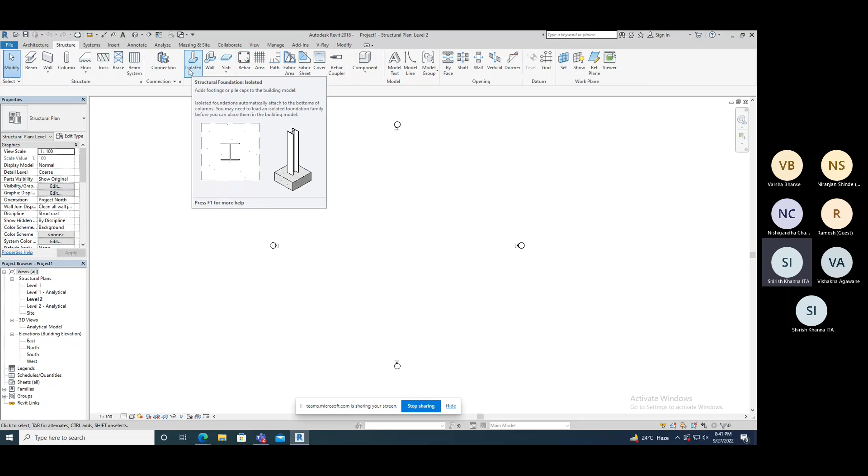Fine. Okay, if you want to place here your foundation, suppose I'm going to use a structure, I'm taking isolated. See the name, don't confuse with the name - it is not an isolated foundation only, it is a name, foundation. You can find out with your family.

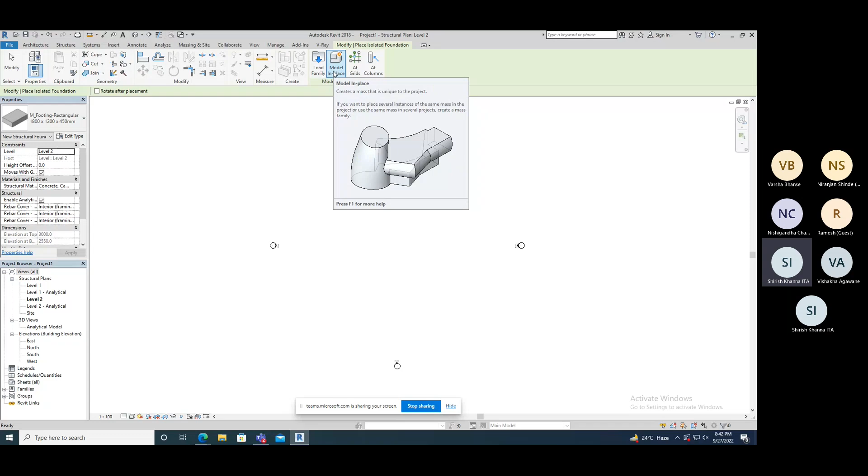Just click on this isolated, and see here in the top we have in the mode we have library. This portion here we have load family, or if you want to create a different type of foundation, we can create into model in place, or we can create into family. Whenever we want to place, we can create the type. But right now we are talking about the family of it.

How many types of foundation are there? So click on this load family tool, and we have to find out. By default here it is taken furniture, but we have to find out our foundation.

So go back. Now see, we are in US metric. In US metric, we are going to find the structural foundations. Click on open - these are the types we have available directly in the library: footing rectangular, pile cap with one pile, this is with two pile, three pile, four pile, five, six, seven, eight, till nine pile we have available here. And then we have pile cap with rectangular wise.

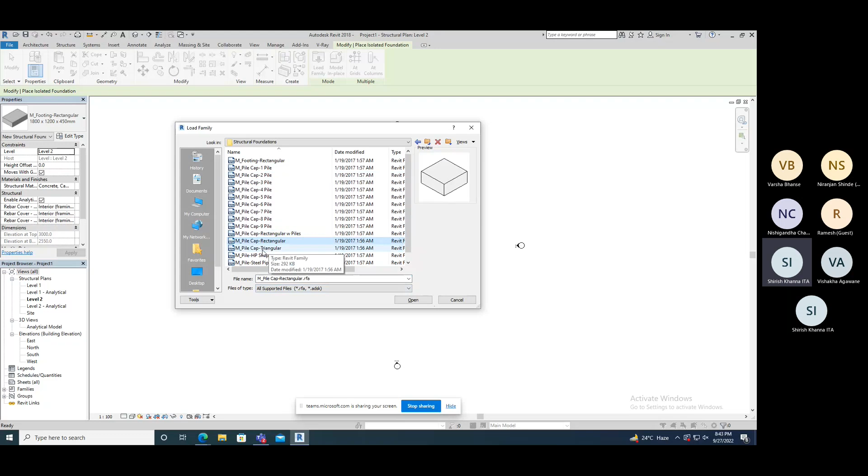We have pile cap rectangular, triangular, HP shape, steel pile. So we have different types of foundation here. But if you want to create some raft type foundation or tapered foundation, we can create our own - I'm telling you when we are working with the family file. Right now we can take from the library.

Okay, now I want to change its size. So what's going to happen is, suppose you click on this - you can see here I'm putting a rectangle 1800 by 1200 by 450. You can see in the properties where it is placed - it's placed at level 2, but we need to place it at level 1. So what we can do, since it's at a higher position, just select all and change its level to level 1, then click apply.

Now it is in level 1, but we are viewing at level 2, that's why it's not visible. So what we have to do is go to view range and change the setting in view range. Otherwise, go to level 1 and we can see it.

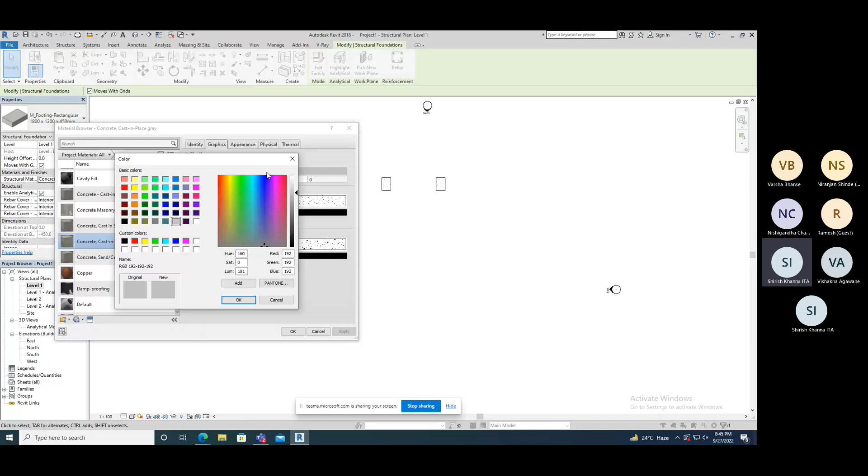You can change its appearance - this is known as appearances. Then change the color of it. Surface pattern - when we are seeing it from the top, it shows by dotted visibility. When we are seeing it in section, it will show like this cut pattern. The pattern should be in black color - see, RGB 000 means black color.

Now, what is the identity of it? Select it, and you can see its name is concrete cast in place. Description: cast in place concrete. Class is concrete - you can take any portion of it. If you have identity, you can change it from here. If you want to give some comment, some keyword, some detail of the manufacturer, model, cost, URL, you can put it here. Okay, this is the identity of the material.

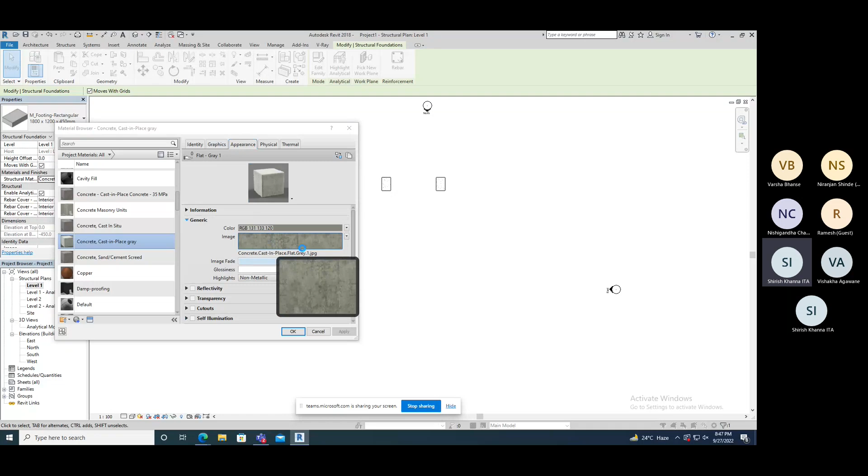Now next is graphics - you see the graphics of it. Now we are going to appearances, we are going to change the 3D image. We can change its image here, we can change its size here - so we can change it easily. Its size is 400 by 500, the tile size. When it's shown in 3D, it shows in this color, in this image. So we can change the image as well as the size of it. We can change the brightness of it. So we have multiple choices of options.

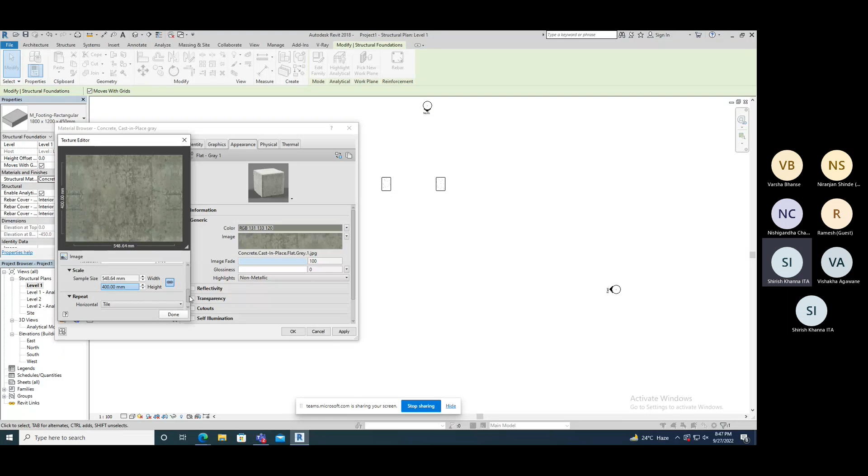The scale we need to change, if you want to change the size of your tile. This is about your appearance, how it's visible in 3D, in realistic view. Then if you have reflectivity, you can put it here. If you have transparency, you can put it here - cutout, self illumination, bump, tint. If you have some values, you can put them here. The colors are different.

Bump image we can change, tint color we can change. This is in appearances - it is for visibility purposes, how it looks in which view.

If I'm talking about the information, we can give here flat gray one - that is color description. Okay, it's a generic material.

Now, if you want to see concrete physical properties, like its name, keywords, type, class, and the basic thermal coefficient of it, you can expand here. Mechanical - you have the behavior of isotropic, Young's modulus, Poisson's ratio, shear modulus, density. If you have your densities here, suppose we go with concrete density basically 2500 kg per meter cube - it will take 2407.31 kg per meter cube. If you have your values, you can type them here.

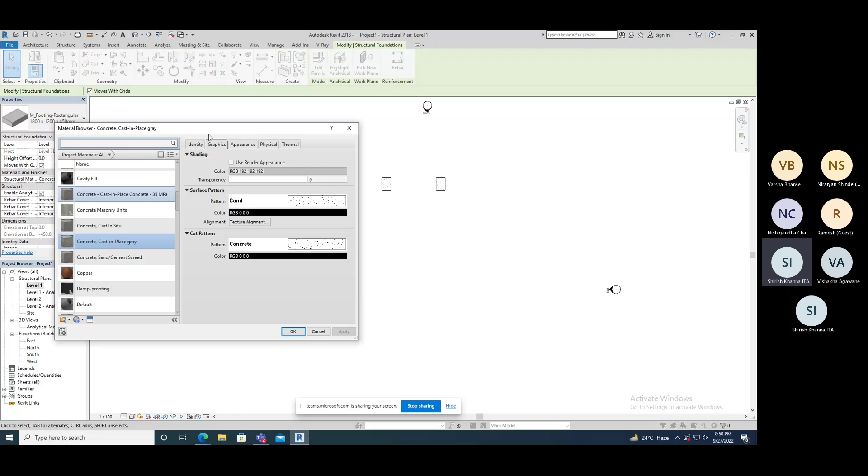This is the predefined material. Now suppose you want to create your own material, a duplicate with your own name.

So what we can do, suppose I'm using this concrete cast in place, but instead of gray color, I'm using green color, and I want to give it the name green. Right click over there and create a duplicate. All properties are same in this, but you can change its name, to green, suppose. All the properties of gray and green are same right now.

You can change its properties, and then you can use this one here. Just apply and click okay.

Clear? Shirish, is there a doubt on how to create a duplicate? Yes, tell me.

Shirish asks: this is only for visibility, right? It doesn't matter for exporting in AutoCAD. Whatever setting we are doing is only for this 3D or visibility, view only, right? Yes, yes, yes, yes, okay.

Continue - when you are giving detailed description, those properties are visible there. When we are creating the schedule, we want to see the material, which material, what are the properties. In quantities, it will separate it out if we select a certain material, right? I just wanted to confirm that it's not going to hamper the extracting of the drawing.

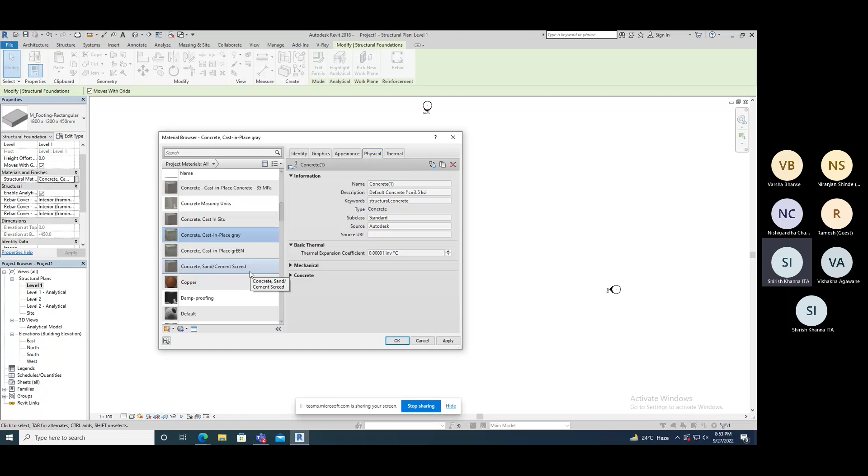Suppose you are going to create another foundation and you want to use the same property but different physical properties - we can't use it directly, that's why we need a duplicate. Anytime we need to use it elsewhere, we should use a duplicate, because if we change the property of that particular material or dimensions directly, it is permanently changed - meaning if you choose the same type for another thing, it keeps the same changes. So every time we are going to change something, we have to take a duplicate.

You always have to take a duplicate material if you want to use a different one. Now if you want to create a new material, we also have a complete library of materials here. Just click on this open/close asset browser, and you can check here - we have all types of materials, the appearances library, physical assets, whichever we want to use, we can use.

But if you... one second now. Hello. Sorry, my baby keeps going off my screen. Hello, I'm audible now. Yes, yes, yes, yes, okay.

Now see, here we have the complete appearances library, the physical material properties for Australia, Canada, Germany and all. Generally we are using physical properties in case of US, or you can use the appearance library. So you can see here we have lots - in concrete, we have lots, cast in place, in ceramic, we have options too.

Now in concrete, you can check here also - see the color. Here we have block, exposed aggregate, aggregate fine, medium, recess, E-form. We can use different types of materials. The appearance is going to change only - this is the color that's going to change. If you want to use the physical properties, go with the physical property US here.

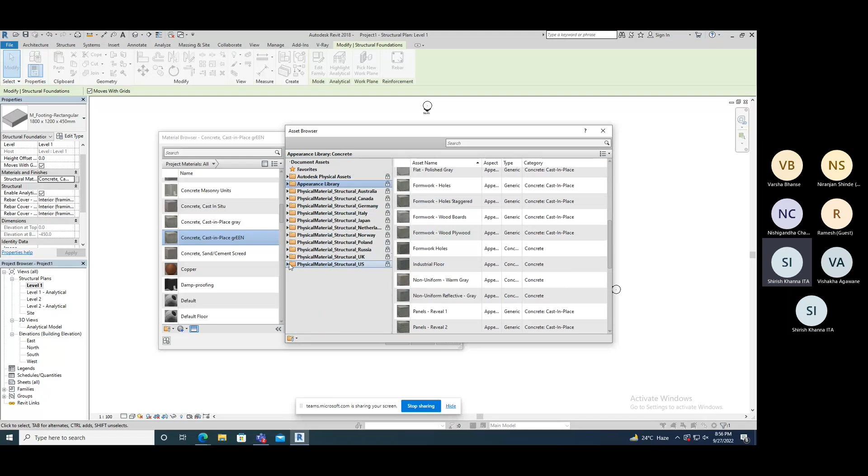And here concrete and steel is there. In concrete, we have lots of options, and similarly in steel, there are lots too. But how to use it? For that, you need to create one new material.

I'm creating a new material here - see the second option, create new material. Use it. And here it is named default material. Now rename it - it is Conc, suppose. I'm giving it the name Conc.

Okay, now I need to give here some different material. Go to asset browser, make sure you're selecting this Conc. And then you are going to use concrete standard. I want to use here the concrete 6 KSI.

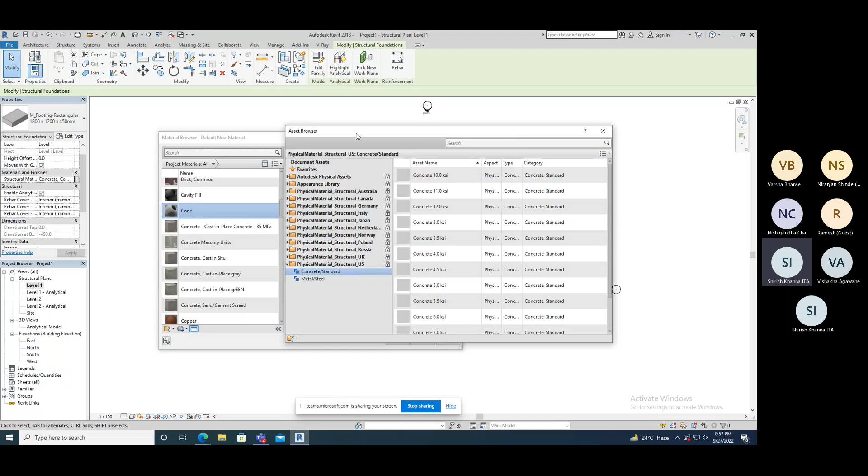Here we have option C, replace. So replace with what? This Conc. Replace it. The 3.5 KSI, all the properties are copied into Conc now. You can see the graphics of it, the appearance of it. It is not changed, right?

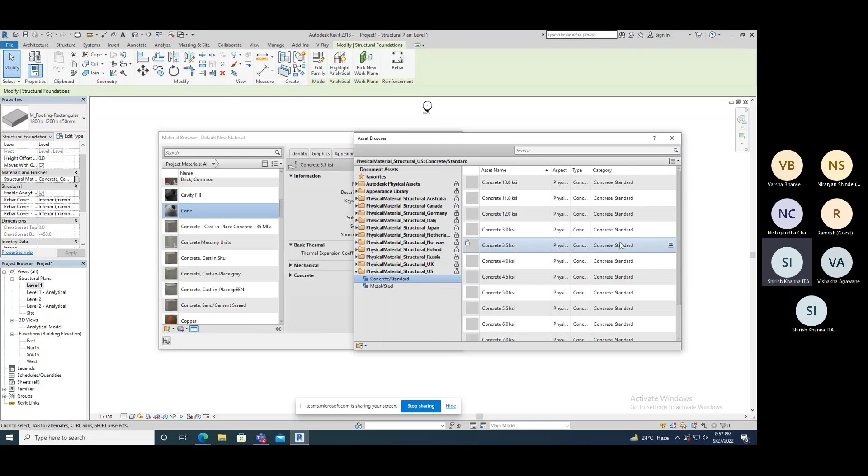Now see, it is changed. See the physical property here, 3.5 KSI. Clear? By default there is nothing, but now we are replacing it with concrete standard 3.5 KSI. This is the replace button. We can change the material over there, and then we can apply it.

Now in this we have Conc material, but in this we have concrete cast. So like this, we can use separate material for separate portions. Sometimes you are using different material, so you can. Is that clear?

Yes, okay. Now second thing is, suppose I need to change the dimension here. First we are going to check the structure portion. When we are working with proper structure, we need to know what is the cover portion. See, this is nothing. The value 1800, 1200, 450 is not visible here.

For that, here we have edit type properties. That is a very important thing. If you understand this type property, you are understanding everything in Revit. This is very important. Just click on edit type property. Now you can see here the width, length, and thickness, visible here, the values.

Now, just suppose you are changing here, I want to change into this only. But if you are changing the value directly here, that will change for all because all have the same value now. I am putting rectangular 1800, 1200, 450. That these three are the same foundation now.

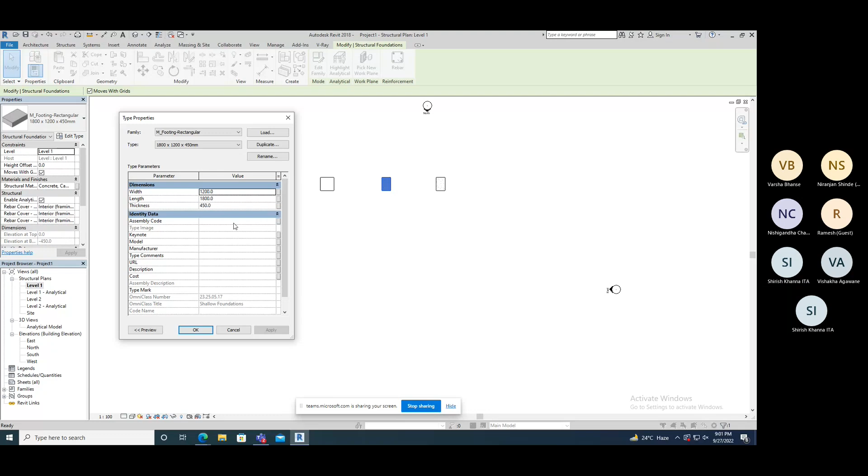Okay, now I need to play some more, like pile type. I'll show you that also. So to isolate it, load family, US metric, structural foundation. Now I'm using, suppose, a pile cap. Open it. See, it is visible here in the property. And now you can use it here like this.

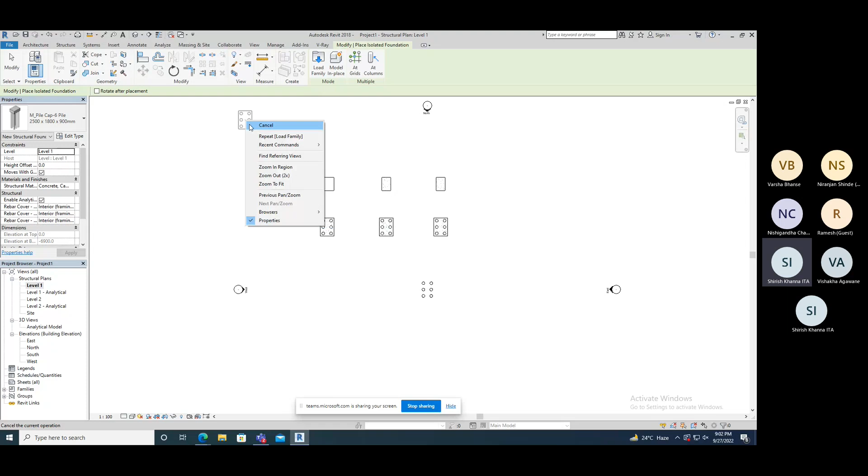Okay, now you can see it in 3D. It is like this. You want to change into realistic view, change the graphic display to realistic.

I have one doubt here. In our view, we don't get this realistic view visible at all. How does it get visible?

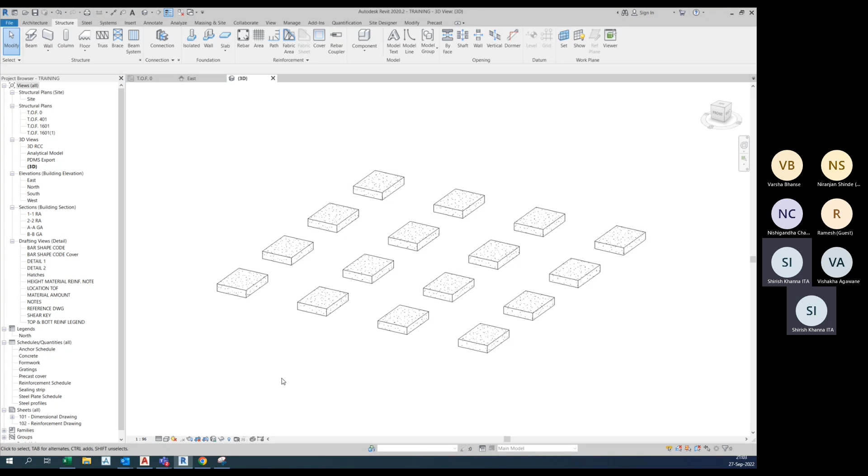And you have closed the property bar, na? Press PP on your keyboard. PP. Properties toolbar, I told you yesterday, na? You need to open the properties toolbar. Open it, you had closed that, na? Yes, yes, open it.

Now see in the graphic display here, edit. Click on the edit, graphic display, not visibility. Sorry, okay.

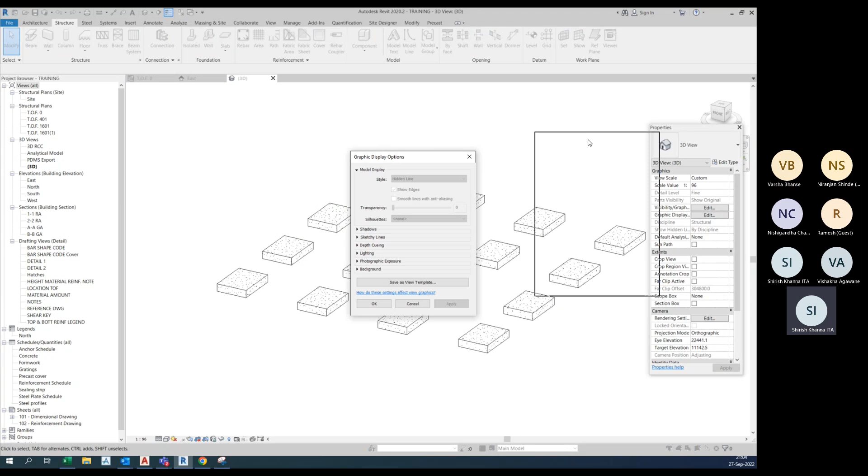Here it is also not visible, na? No, you logged something, nothing is visible. Close it. Visibility graphics is also not visible in your system.

Click on VG or click on edit. Here it is also not highlighted, na? Yeah. Okay, one second.

Actually, we are using our office template here. So in our property bar, we are using formwork template. No, in that all these windows will be visible in that template.

I'm getting you, Varsha. Go down after the camera. Where? Can you give me access? Yeah. Here we can visible all that things.

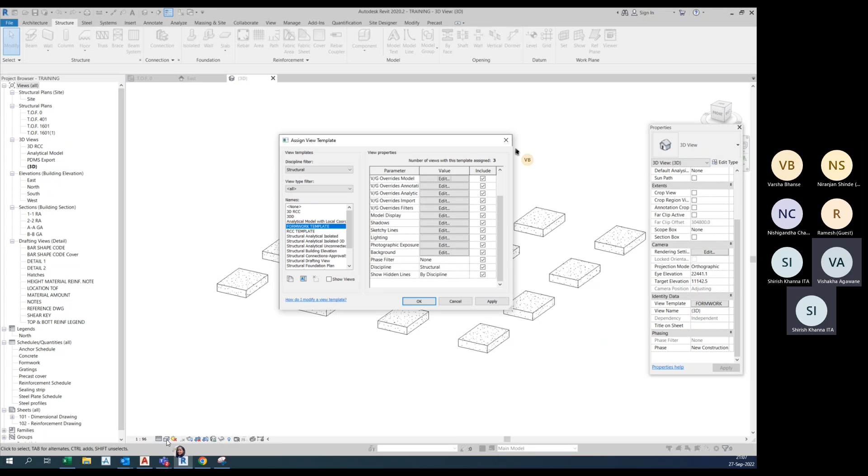And go to, actually, there is display graphics, finish pile foundation. Okay, sorry. No, actually, we need the pile foundation elevation 3D object, right? No, we have put foundation, but here we need to change it in realistic and other property, that is not visible here. This screen is off. Okay.

In my system, it is view template is none right now. Go with none, you can able to use. If you are using a structural model and analytical, you are not able to see. Yes. Okay, go with none, change the formwork to none, and then you can able to select all. None is selected.

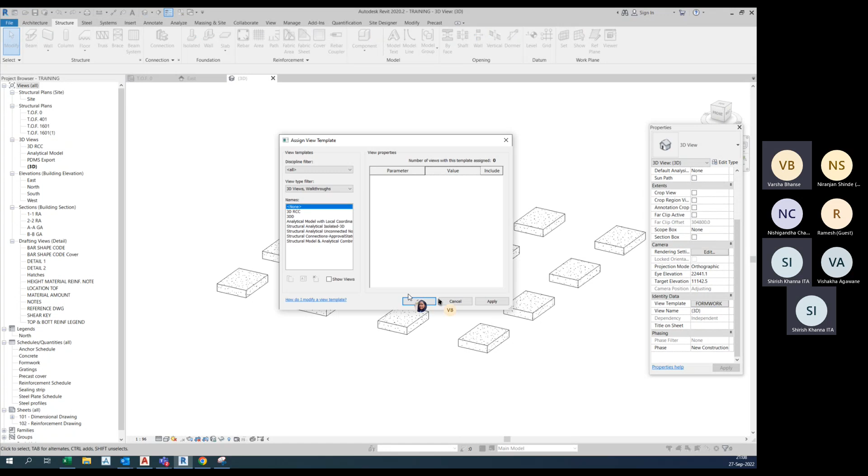So why shows formwork then? Here no, cancel it. Okay, here you have to say select none. None is there now. Now it is none. Okay. Now it is visible. Oh, yeah.

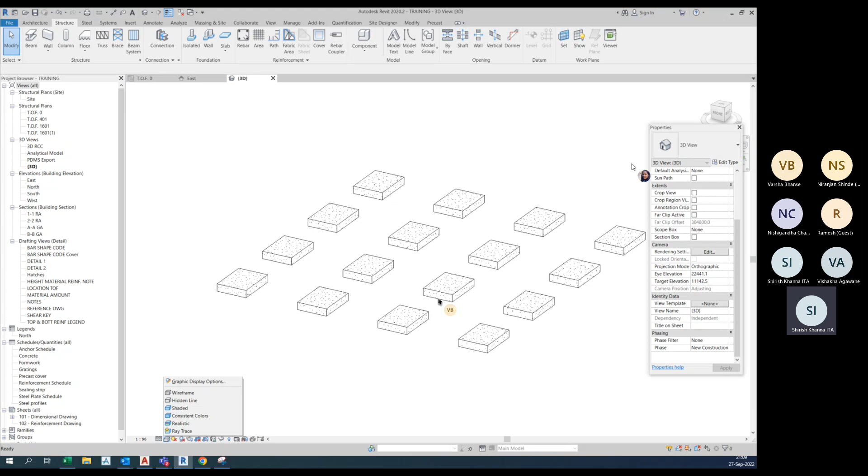In particular template, the graphics is changed. Okay. Yes. Okay, then. Now I shared again. Yeah, you can share, please. Now, next is

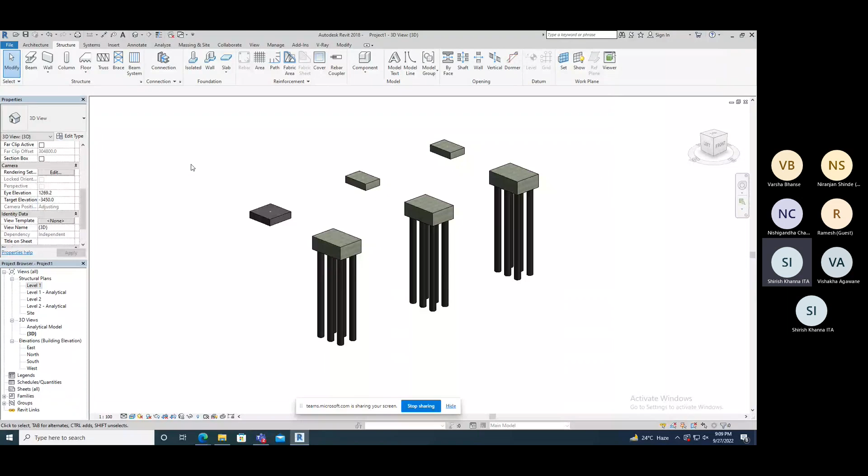this is about the properties, okay, and which type of foundation you want to use. Till now, any doubt? No, how to change the material, how to create a new material, how to replace with asset from asset browser, how to change the length, width, and height of it. All clear? Yes. See, all the things are visible into a particular property.

You are clicking on this. Here the elevation is minus 16,900. We can go to edit type and we can change it here. Okay, total length, cutoff length, clearance, width, foundation thickness is 900 here. We can change these all.

Here we have some more types, a structural foundation, 400 diameter. Okay, the diameter we can change also. Clear? Right now we have only one, that is 400 diameter. If you want to change or create a new one, so we can create into family. We can change it. Clear?

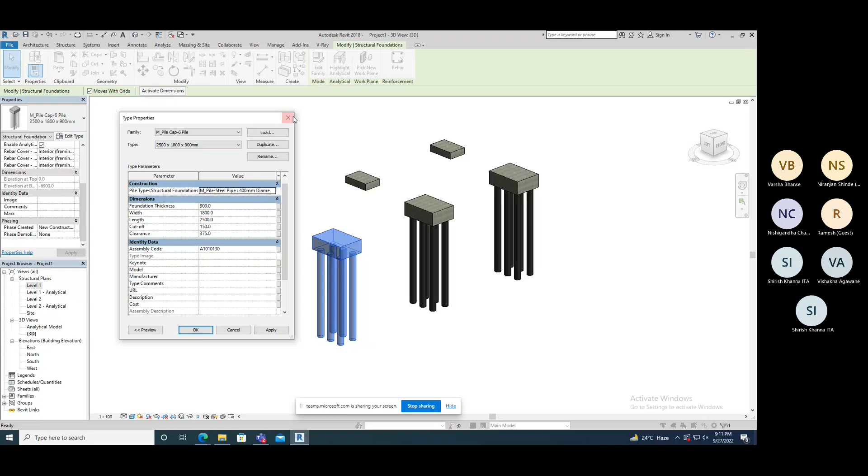Now, next is, are you aware about this tools, modify tools? Tell me first. You all know AutoCAD, na? Offset, move, copy, yes, rotate, yes yes, mirror, all commands you know. Now, how to use in Revit, I tell you this one.

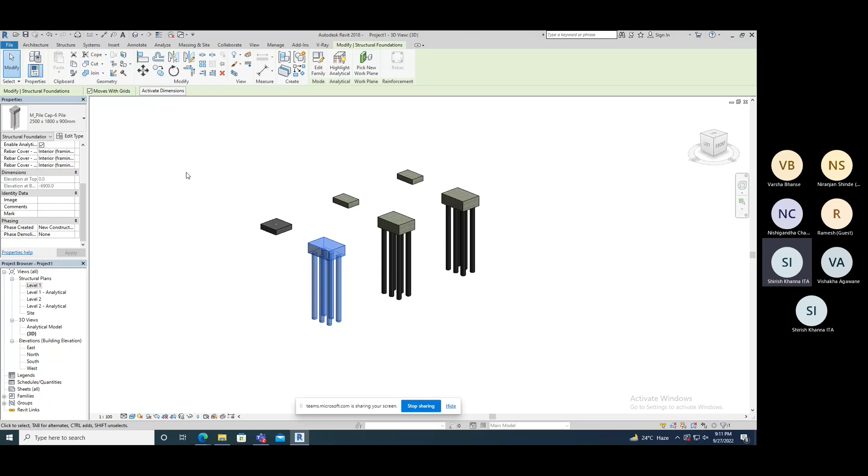Okay, this is all we want to use into this. See, every time we are not going to create a grid on all in the starting. We are just playing when we have to display to someone dimensions. Then we are using generally grids. Otherwise, directly we can create with proper dimensions. So that time we need that modify tools.

I'm going to level 1, and I suppose I have one foundation, this one, and I need to copy it. See, I don't have grid. So how much distance I want to copy or move? Suppose I want to move something, some portion. So we have modify tools. Go to modify tab in the top, and here we have modify tools.

First is align, second offset. Then we have two types of mirror here. Then we have split elements, split with gap, pin, unpin, scale, array, move, copy, rotate, and trim, three types, and then delete. Okay, I'm going to tell you these all first. Then we start creating drawings.

Okay, now suppose I have one more foundation placed here. Now I need to place it in an aligned way, means one is below it. So then what you do? Select and you can try to move it like this. Yes, this is one type. But you want to place properly in the linear, see both are same, then you can use place in the middle, aligned. Okay, but in case it's different shape, then I want to align by outer edges.

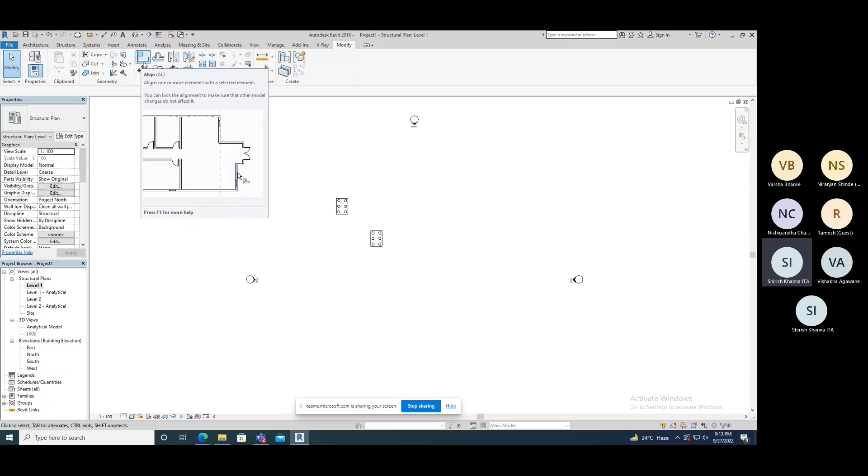So we have a command here into modify. First command name is align, shortcut is AL. No need to remember the shortcut because it shows when we are placing the cursor on the command, it shows 'align' in bracket AL. Just type AL, you are in the align command. Okay, I'm taking this one.

First it is asking for select first edge, then second edge, which is going to be aligned. Clear? So sometimes it is going to be moved after using align. I'm cancelling—it is aligned temporarily. If you are moving it, again it is going to be moved.

But you want to fix it with the previous one at the time of aligning. So again align with this. I want to fix it, so here we have a lock option. Just click on it, it is locked now. Now I want to move it—both are moved. So we can lock the alignment also.

Now I need to move here with a proper command. Generally we are going to move by dragging. By arrow keys you can move—this is by arrow key, we can move in the keyboard: right, left, top, bottom, wherever you want to move it. But if you want to go with the dimension, we can move through the dimension also.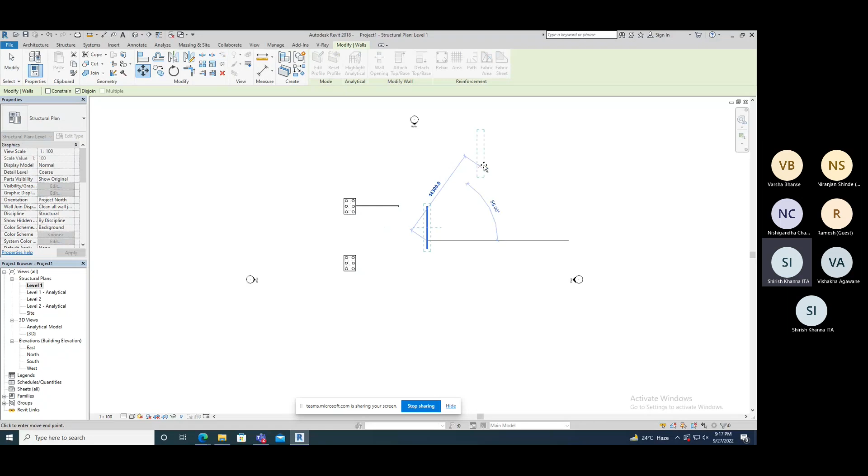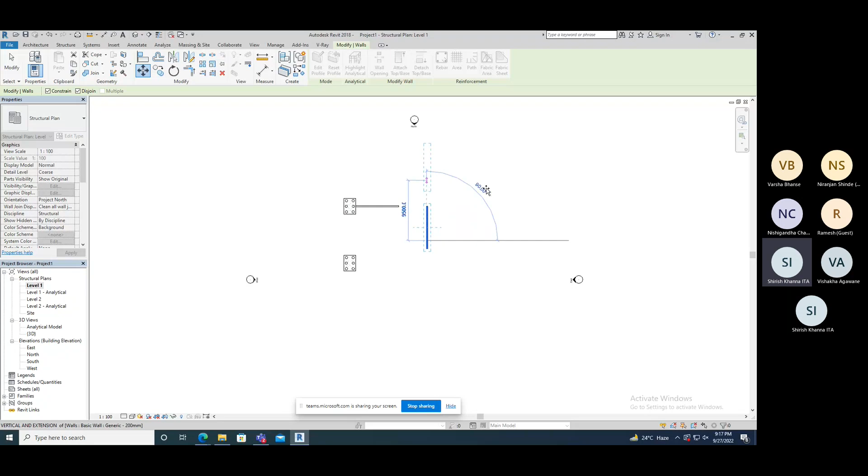Now one more thing is here: when we are going to move by command, we can move in any direction, at any angle. Now if you want to move only in X and Y, here we have the option constraint. So constraint is like ortho mode in AutoCAD. Just click on it and you are able to place only horizontal or vertical—now at any angle you are not able to place it.

Any doubt in move command? Align, move, clear?

Yes, okay. Now next we have offset. Suppose I need to create one wall at 1000 millimeter or 2000 millimeter, so we can go to offset. The shortcut is OF here. Click on it and type the value here, 2000.

Here we have two options, distance and copy. If you want to create one more, meaning copy, just click which side you want to create the offset. Click that side, so we can create multiple offsets. Okay.

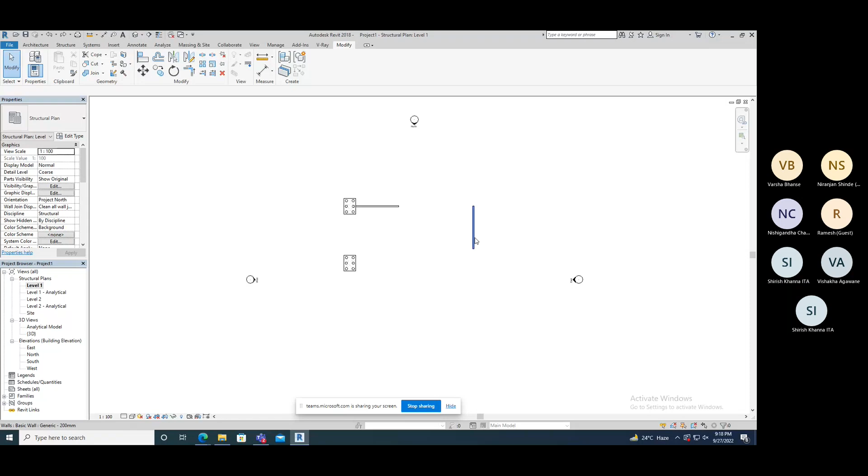Or if you want to change—see, every time we get only at 2000 distance by offset. Now just suppose I want first at 1000, second at 2000, third at 3000. So we need to take offset 3 times and change the value. So we can use copy for this.

So here we have the command copy, the shortcut is CO. Click on it, select your object, finish selection, then pick a base point like in move, and then copy it. See, first I want 1000, then I want 2000—sorry, it is a single copy now. If you want to copy multiple, here in copy we have an option.

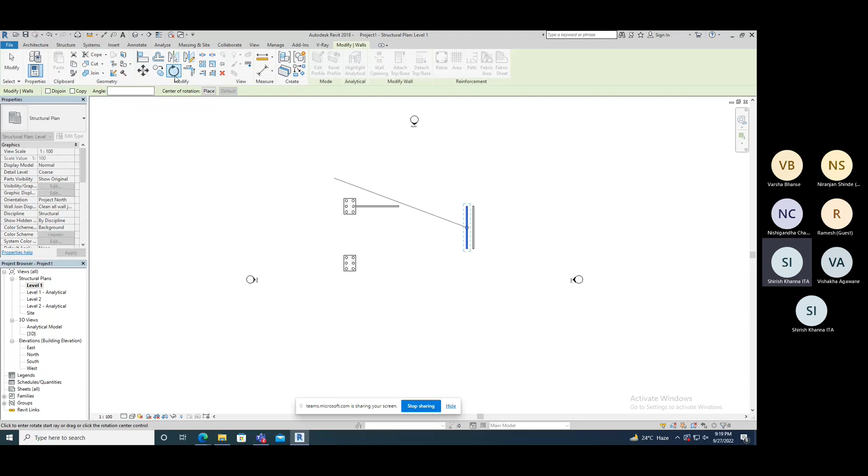Oh sorry, I'm taking the rotate command—copy. See, here we have multiple options. From the base point here: 2000, then 3000, then 4000. So like this we can copy. Clear? Any doubt in copy and offset?

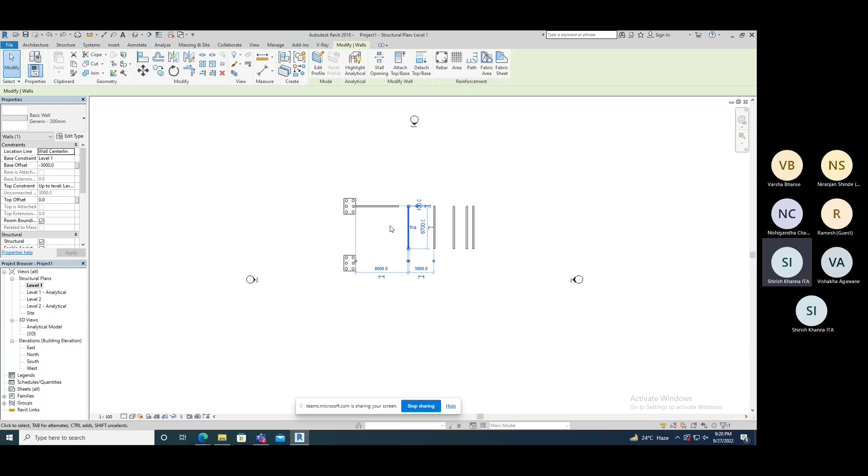Next is rotate. Suppose I'm joining these two. Now I want to rotate by this point, by 45 degrees, either this side or this side. We have command rotate. By default it's taken the middle point. See, it is rotated by this point, but I want to rotate by this point.

What we can do, see the options in the option bar. First is Disjoin - if we are rotating from here and rotate here like this, it will be extended or not, based on this join. Then if you want another copy at 45 degrees, you can click on copy.

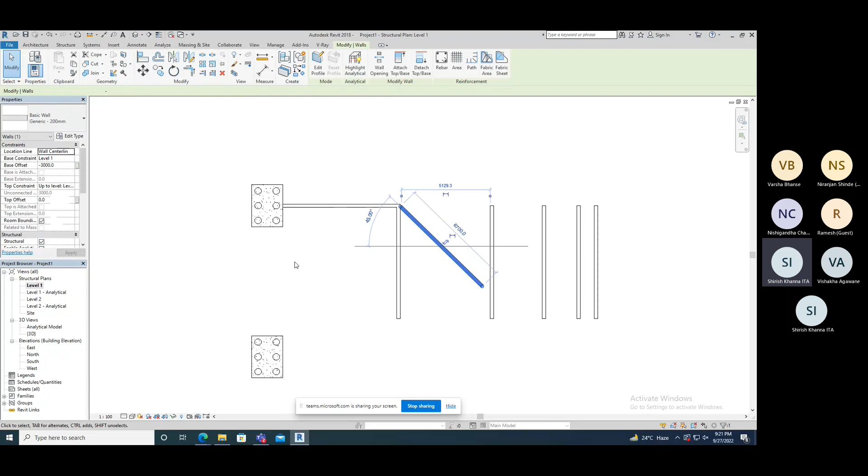How much rotation - 45. But I want to change the center first, so we have the option 'place center of rotation'. Click the place button and now you can change it by this point. See, now it is rotated by this. And how much you want to rotate by? 45 degrees. See, it creates one more because we are clicking the copy command.

Clear? Rotate command - you need to type the angle and enter. If you don't want to create a copy, rotate - place point is this, and I don't need copy, I need 45 degrees only. See?

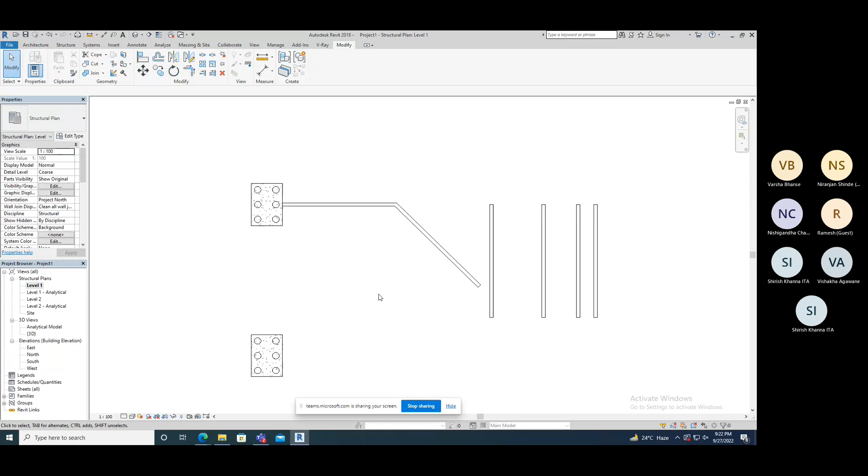Clear? That additional toolbar is not coming at mine. Sorry, the additional - can you click on the rotate command? Yeah. Okay, and then you are getting one additional tab over there, right? For giving the option bar - angle, yeah, so for that you need to select. After selecting, yes. It is not available till now because you need to tell Revit the selection is complete. So right click and finish your selection first. Okay, then you will get it. Otherwise, first select and then go to your command. Okay, then you need not tell it.

Okay, now rotate is clear. Ramesh, Niranjan, all clear? Yes. Okay. Ramesh, Niranjan - you said Niranjan is clear. Okay, Ramesh, are you there?

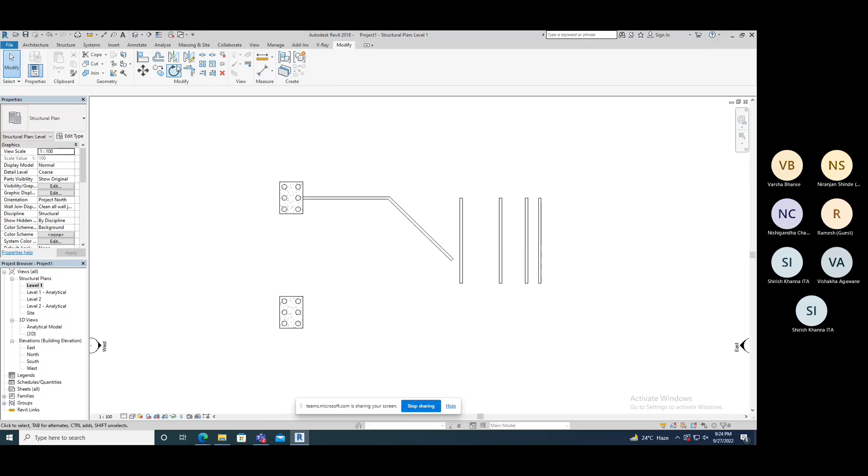Mirror - so here we have two options. First is mirror pick axis, shortcut is MM, and mirror draw axis, shortcut is DM. So what is the difference? Names also tell us the difference. Pick axis means you need an axis here so that you can create a mirror.

So I need one more wall. Suppose I'm taking one more wall here in the middle like this. If you have some kind of axis, you can use mirror pick axis. Then it is asking for select your object, finish selection, then select your axis, you get the mirror. Okay.

Otherwise, same thing - first select the object, so no need to finish selection. First select your object, then go to command. Then it is not asking for finish selection. Okay, just select your axis and you get the mirror. Or in case you didn't have an axis and you need that mirror,

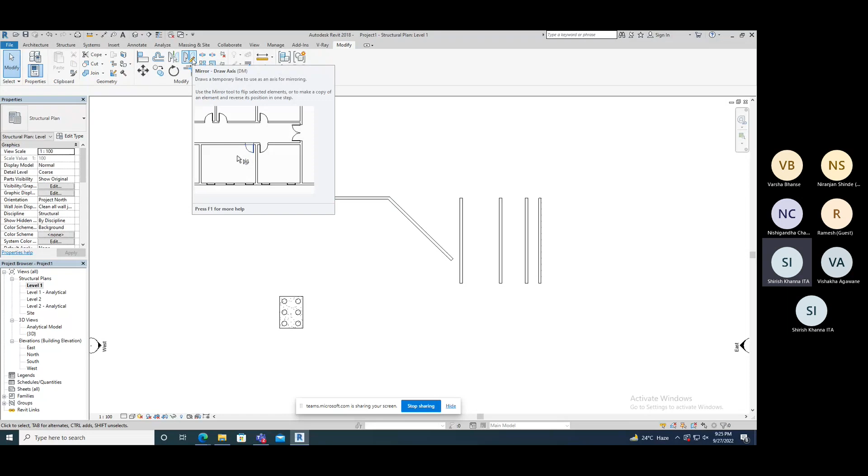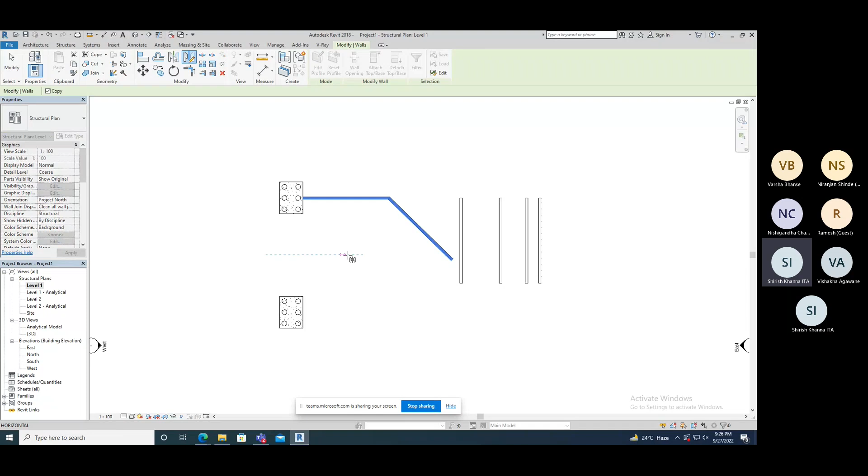then you can create it like in AutoCAD. In AutoCAD, we are going to create a virtual axis, na? Virtual line we can create in CAD. Same here, we can create a virtual axis here also. Go with this draw axis, mirror draw axis - select your object, finish selection, and create your axis here, first point and second point. You get the mirror. Clear?

In case you didn't have an axis, you can go with DM, the draw axis. Otherwise, you can use pick axis.

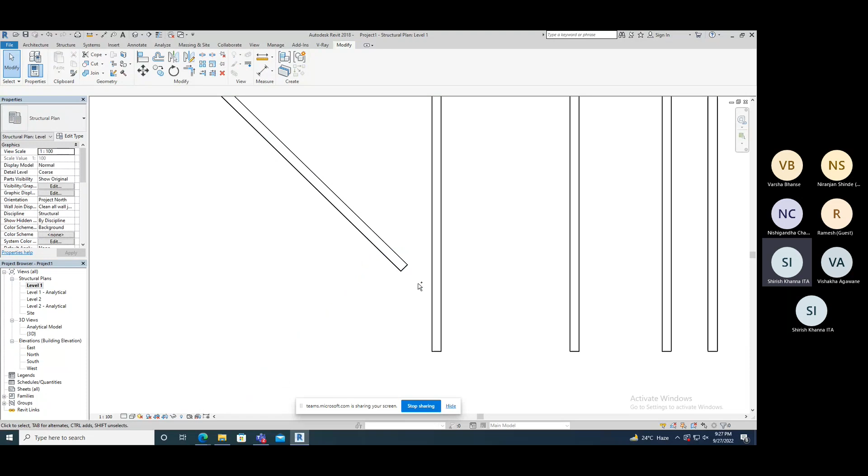Now next we have split. Split means divided into two parts. Suppose I need to split - by default, if I need to delete this portion, see, the total is deleted. So what we can do, we can split it, we can trim it - we have multiple options. Now I'm telling you split first. Split means you are dividing one wall or anything into two parts. The shortcut is SL.

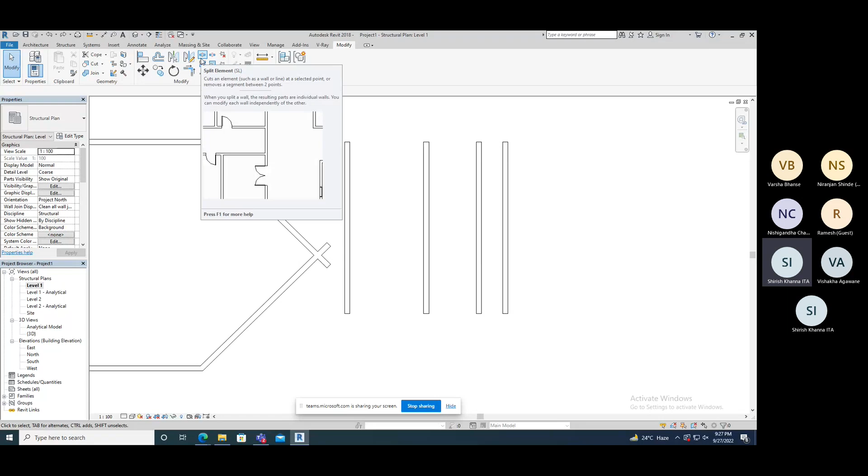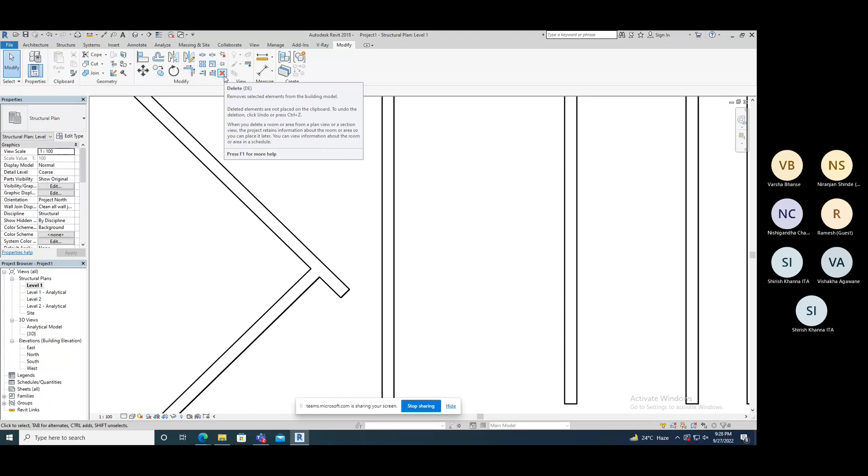Okay, this is split. Now going to the split command, you can place where you want to split here. Cancel now - see, it is different, separate portion, we can delete it. Clear? Delete - you can use the delete button as well as this cross.

Now here we have next split with gap. If you want to give some gap between the two, you can use this one. The gap is suppose 1 inch, 25.4. You want now 50mm, 2 inches - you can type, change the value, and just click, you get the gap. See, this is split with gap.

Next, we have pin and unpin. Suppose we have this object and we can move it anytime, or by default it can be moved or change its shape. So we have to fix them so that by default this is not going to be changed. So we can pin it. The pin command shortcut is PN, click on it.

Finish selection. Now it is pinned. Pin means now it is not going to move by default. See, I'm trying to drag it, but it is not moving. By arrow key also it is not moving.

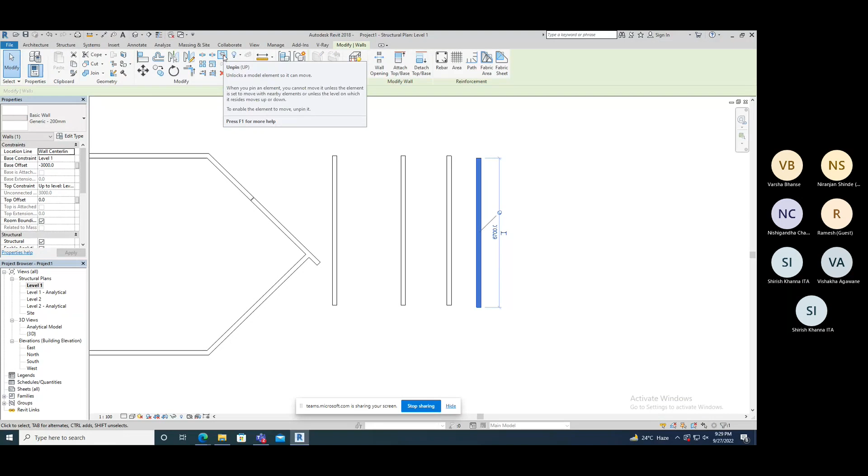It shows you can't move a pinned element. Even you can't delete it. See, pinned objects were not deleted. To delete them, you need to unpin it. How to unpin? Just click on this pin, or we have the unpin command. Unpin it, now you can move it, you can delete it. Clear? For a safety purpose, we can use pin.

Shirish: by mistake, it is not changed, yeah. Why pin it then, is there any reason for pin? Telling you, this is for safety purpose, so that drawing has not changed by mistake, mistakenly shifted. So is it better when sometimes you fix the location, you can pin it so that it will not move? Yes, yes.

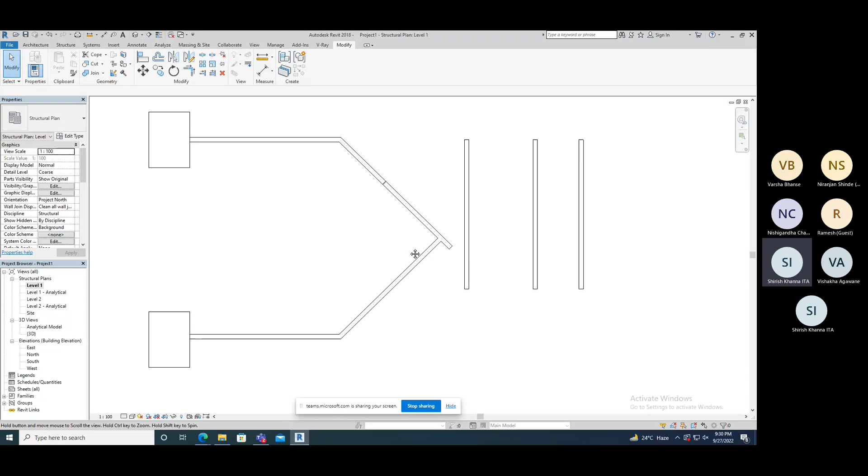So by mistake, it is not going to be changed, that's why we pin them. If you want to change, you can unpin it easily and then move it. Or like everywhere we are using right now the child lock, no? That is like that. Yeah, yeah. Okay, nobody can change it easily. If you want to change, you have to unpin first. Pin, unpin, delete is okay.

Next we have rotate, and after rotate we have trim command. Shirish asks: if I am working in some document, I finish it and I have pinned it, and if Vishakha is going to work further on that document, can she unpin it, or do I have to open and unpin it?

No, she can unpin it, it doesn't matter with user. User doesn't matter. For that, if you want to work like a project and you are using separate portions, that is a different thing, that basically comes under work sharing. In that case, if you are working on a document and somebody wants to change it, she wants permission first from you. Then you give the permission, only then she can change it. Otherwise it's not going to change anything. That is not pin and unpin, that is work sharing. Yeah, okay, I got it.

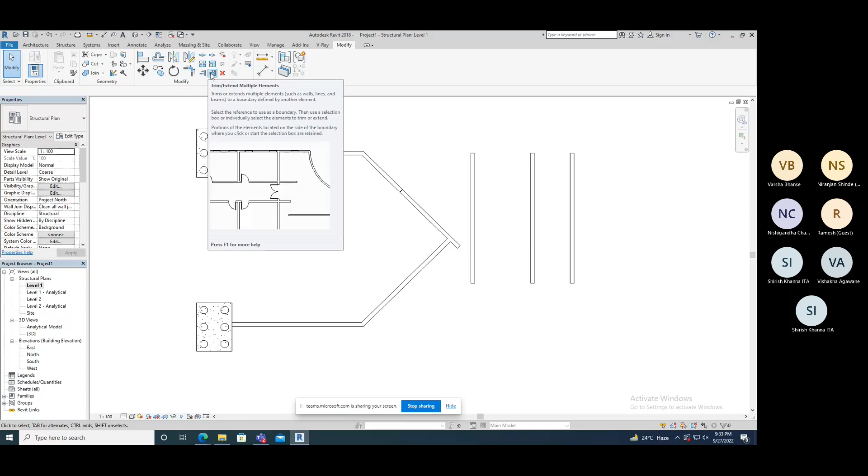Clear? Now we have the trim command. We have three types of trim, you can see by name: trim extend to corner, trim extend single element, trim extend multiple elements. The name will be clear now.

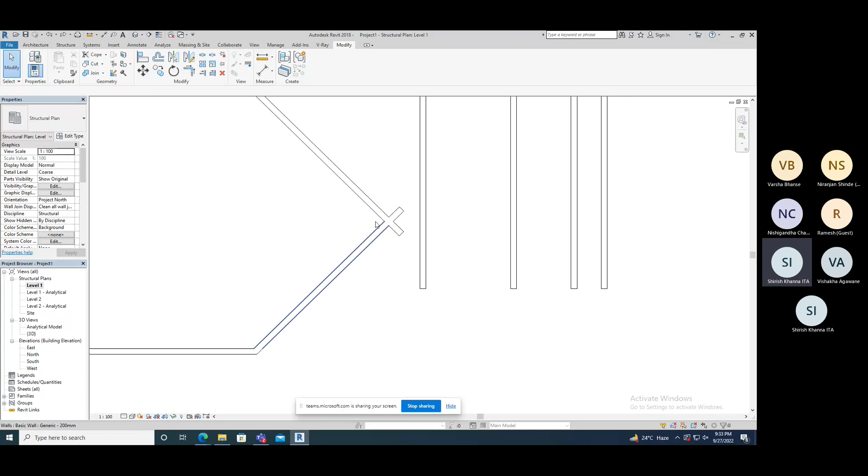Making corner: suppose you want to create a corner here. Before it, here we have two extra portions. I want to create only the corner, the extra portions I want to delete, I want to create a corner here only. So we have the first option: trim extend to corner. Click on it and select the side which you want, the other side will be removed.

Clear? Yes, it's same like AutoCAD, using fillet like trim. In AutoCAD, trimming portion is different, you have to select the portion you want to delete. Here it's opposite. I'm telling about fillet command. In fillet, in AutoCAD, you can't delete something, in fillet you are giving the curved shape, or you can join only, you can't remove that portion in fillet. Okay, got this. Now, if you want to use trim option into the fillet, then you can use this.

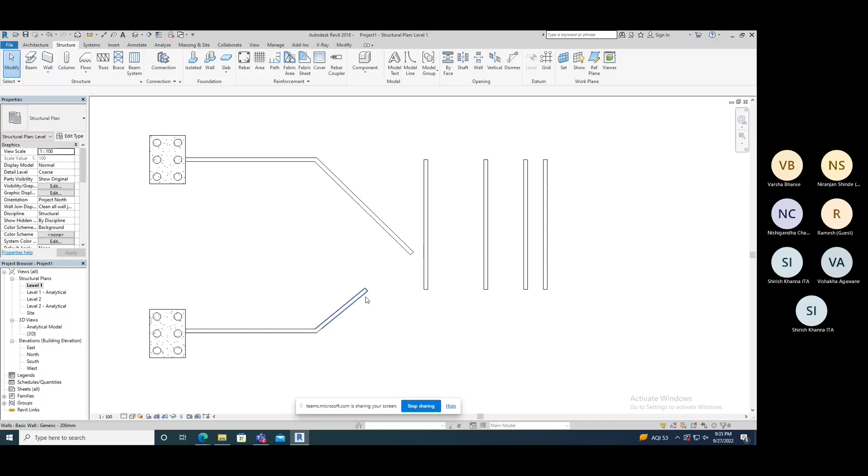See here, next, if this wall is not connected like this, I have a wall, it's not connected, I want to connect them. Means I want to extend this till here and make a corner. Same command you can use in trim and extend, for trimming also, for extension also. Select both the walls.

Clear? This we can also use as fillet in AutoCAD.

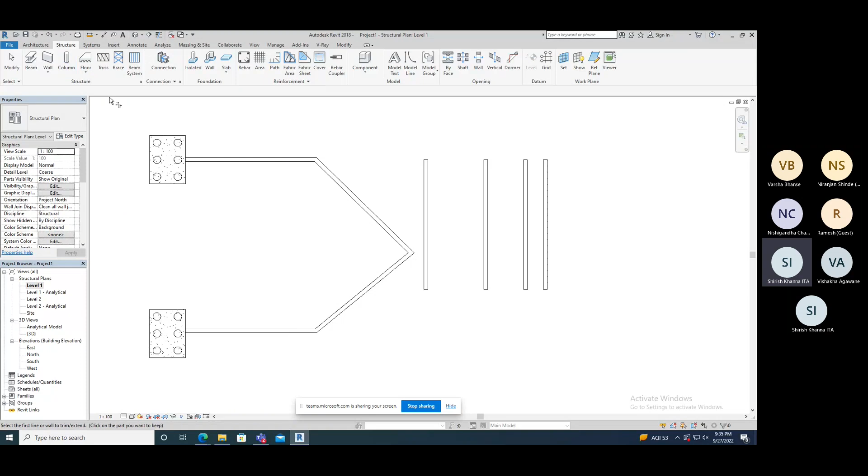Now, next we have suppose more walls here. I'm taking one wall like this. Now I want to trim only one portion, this one. I'm using the trim corner, so both are deleted.

Yes, I want to delete only a single element. So we can use trim single element. Okay, the trim single element you can use.

In this case, you have to remember one thing: first, you need to select a reference. See the cursor, select a reference as a trim extend boundary. The boundary is this one or this one. You can take any one, and then select which side you want to keep. The other side will be removed. Every time you have to select the other side in trimming.

Now, same thing if you want to remove all these three with reference of this wall, here we have multiple trim. Trim extend multiple elements.

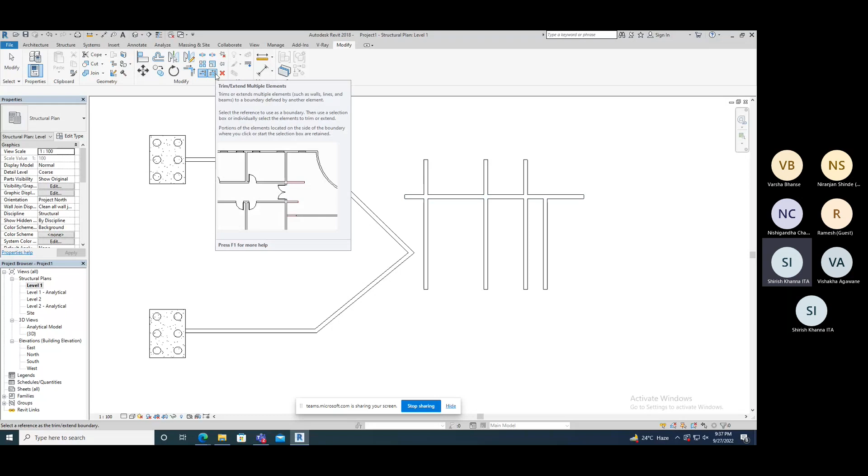Similarly here, it's asking to first select the reference. Then you can select by dragging. Oh sorry, I want to remove the upper side, so select the other side here. Sorry, first reference, then these are clear. Single element, multiple element, and corner.

Tell me, is it clear? Yes. Okay, because all these commands we are using when we are creating the structure. That's why I'm telling you the modify tools first.

Now next we have array and scaling. Suppose I want this foundation, say 5, required in a linear way here along the x-axis, and the distance is suppose 5 meters. So we can copy it, we can offset it, or we can use array here. Shortcut is AR, like in AutoCAD.

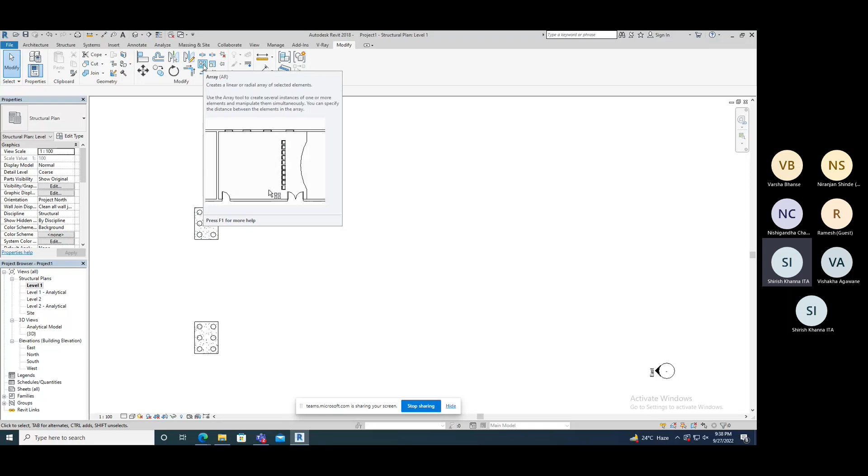So here we have two types: first, select object and take a finish selection. Otherwise, select object first, then go to your command so that you can get this option bar directly.

Next, here we have two options: linear and radial. Linear means your rectangular array, and why is it linear? Because it is moving in only a single direction. In a rectangular array, there are two directions, X and Y. Here we have a single direction, that's why its name is linear. Radial means polar array, it is about one circle.

Now, if you want to select all at a time, you can create it as a group. If you want to select a single entity, you can uncheck it. If you uncheck it, it is not editable after creating. If it is in a group, we can add a number.

Now, how many numbers do we require? Suppose 5. Here we have two options, second and last. Second means you have the distance between two. See, I'm using the base point and giving the distance between two, let's take 5 meters. Now all 5 are created.

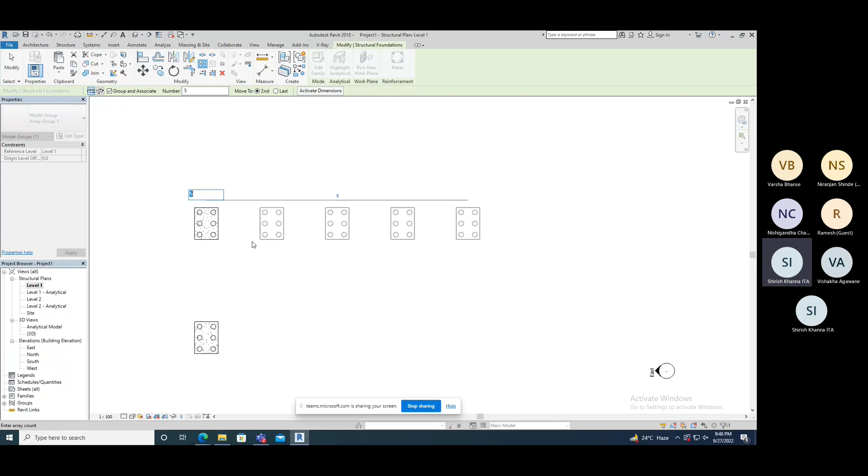It is a group, that's why this number is visible. If you want 6 here, change it and you can edit it to 6. If you are unchecking that group and associate option, it is not editable then, you can't get this value.

But once we use this array command and want to use a middle one, is it editable? Sorry, once we use the array command and create one like 6 as you did, and I wanted to update the third number, third part, update only a single one? You want to update individual size?

No, you can't change the value by arrow key if it's in a group. If you want individual objects, you need to uncheck the group. Only then you can use it individually, otherwise it's just part of the array.

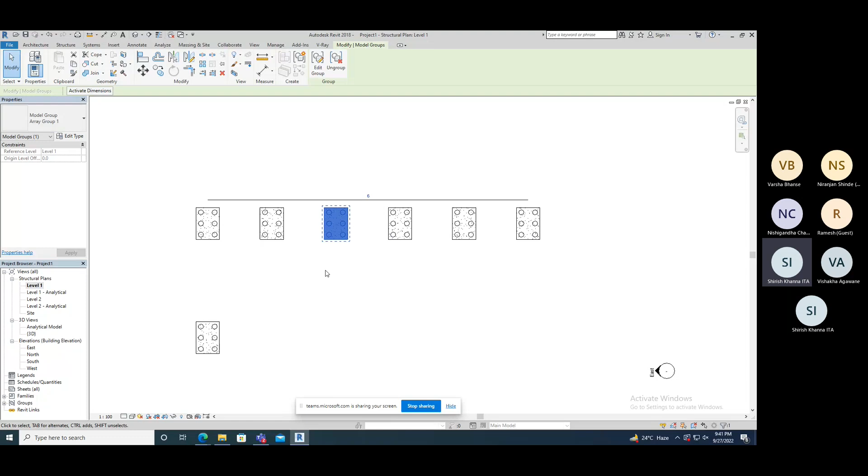Okay, if you want it separate, what we can do is I'm using undo here. I'm going to take the object, linear array, group and associate, uncheck it. Give it a value of 5 and use any value here. Now you can change any one here and there, separate, because it is not a part of the array now.

You can't change the numbers. Okay, and one more option was there in array. If you click on array, Last - that is the option Last.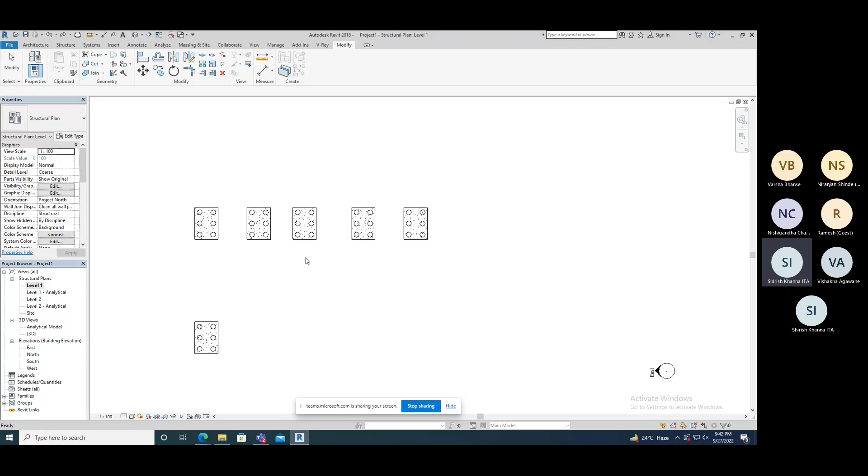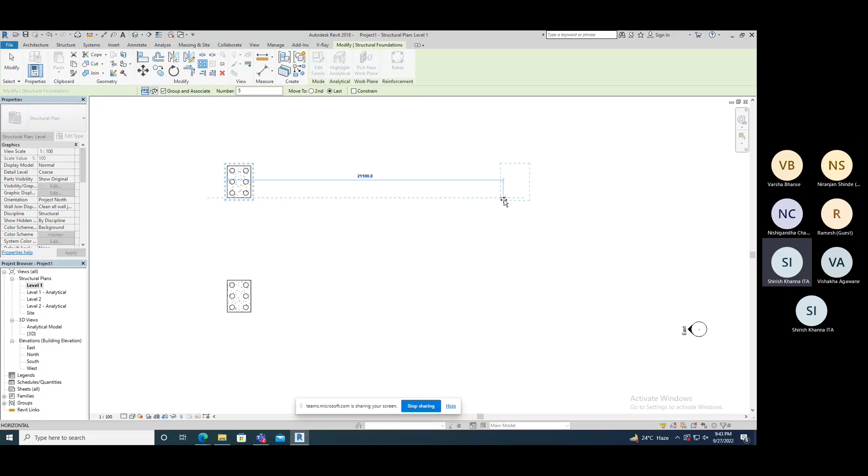In 2nd, second means you have the dimension between the two. Now select array, here we have the option Last. Last means you have the distance between first and last. Suppose you have a total distance of 20,000 and you need to create 5 between them. You can select Last and base point and take the first 20,000 value. So between that 20,000 you get 5 objects.

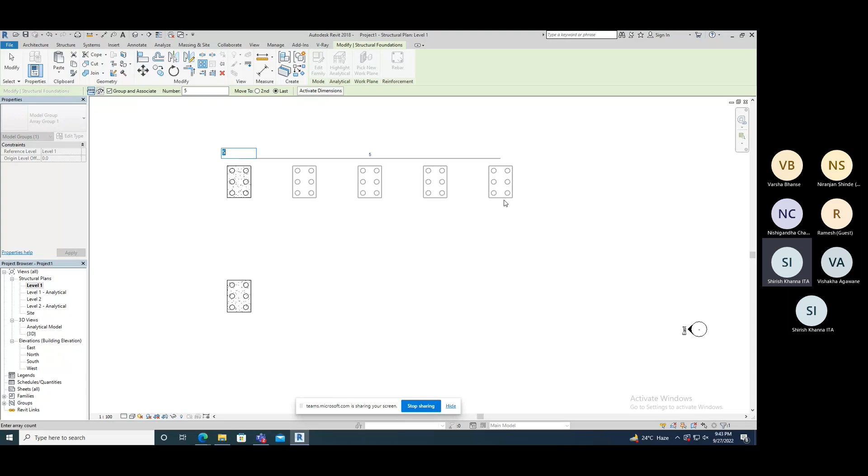Now individually I don't know how much is this. Okay, you have total distance now, total span, that is 20,000, 20 meter. Clear? Yes, center to center it is 20 meter.

Okay, constraint, last option is constraint. In that, constraint means in a linear way, in which direction, in x, y, or at any angle you want to create, that constraint option will be there. Okay, now after that you want to select your array.

Here we have option C. You can add it into group. You can ungroup it so that you can change it particularly. Okay.

Your previous answer, after creating grouping, in middle you can ungroup it, uncheck. Otherwise, you can ungroup it here, then you can able to change it. Okay, again we can group it.

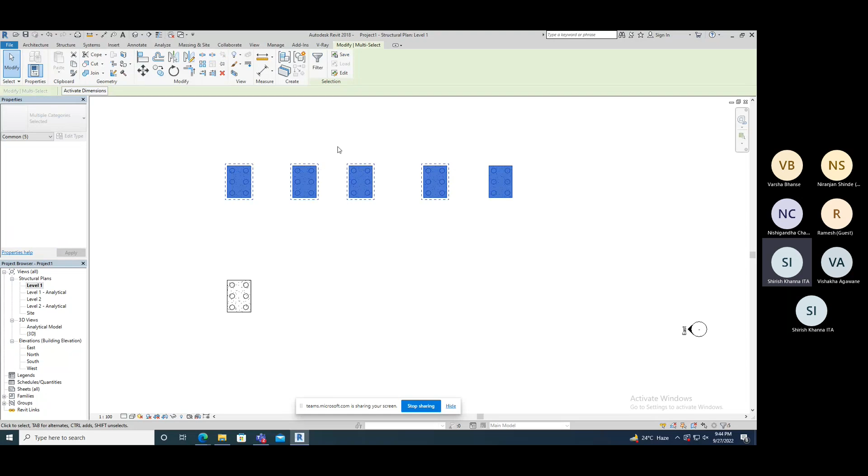Any doubt, any problem in normal array? Now we are going for radial. Oh sorry, I need that.

So suppose here we have one foundation. I want to rotate foundations about this foundation. I want 6 about this foundation. One is there, I move 5 more, 6 total. Then select it, I want to rotate this one. So go for array radial.

How many numbers? I need 6. Total span I required 360. Okay, but the center I need to change. So place center of this I required. Okay, and enter.

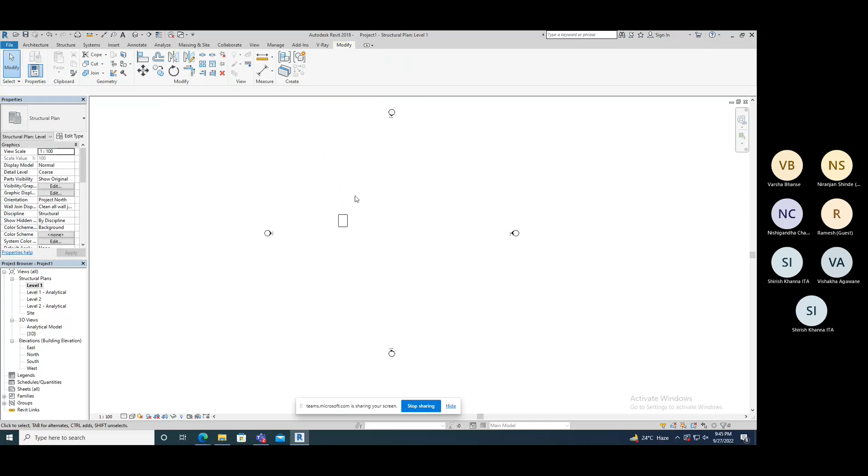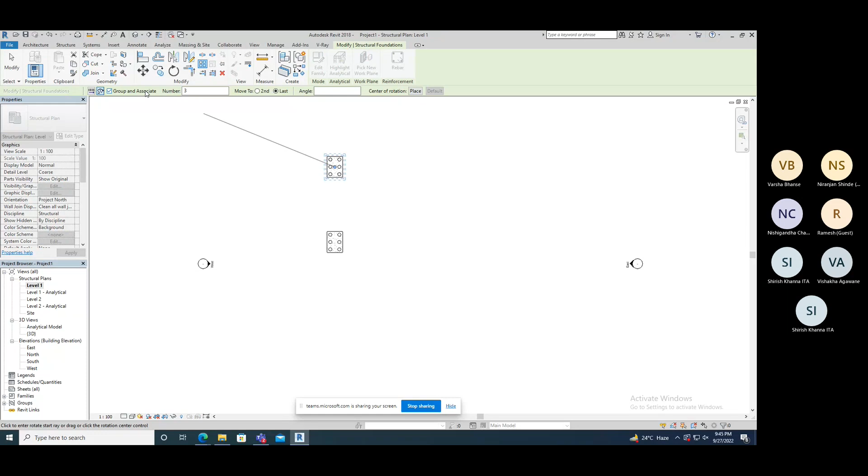Where it is? One second now. Array radial, how many there? 6 we require. Oh sorry, it is taken last. Coming in 360 means it is repeated 6 times.

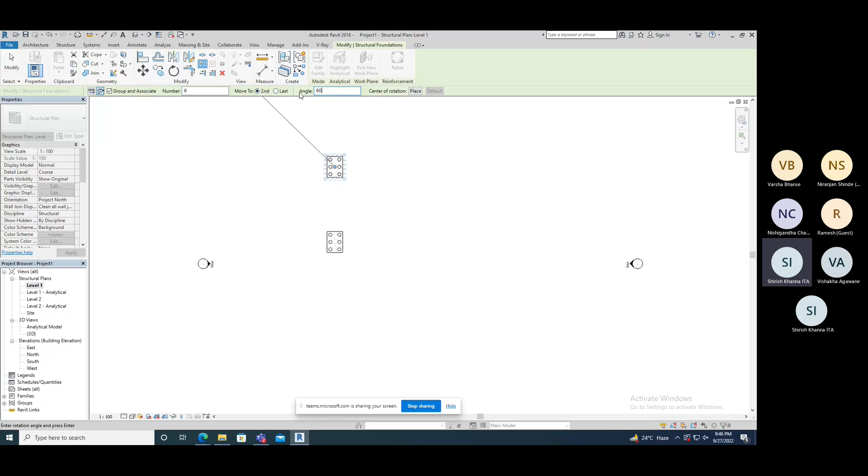Okay, I'm using second here, and angle is 60 degrees suppose, and the placement is changed by its center. Enter it. So foundation is not going to be rotated.

Let's take other things. I'm taking suppose one simple column, not taking a steel column, concrete required, and one is here. Let's check why it is not available in foundation. So let's check in this case.

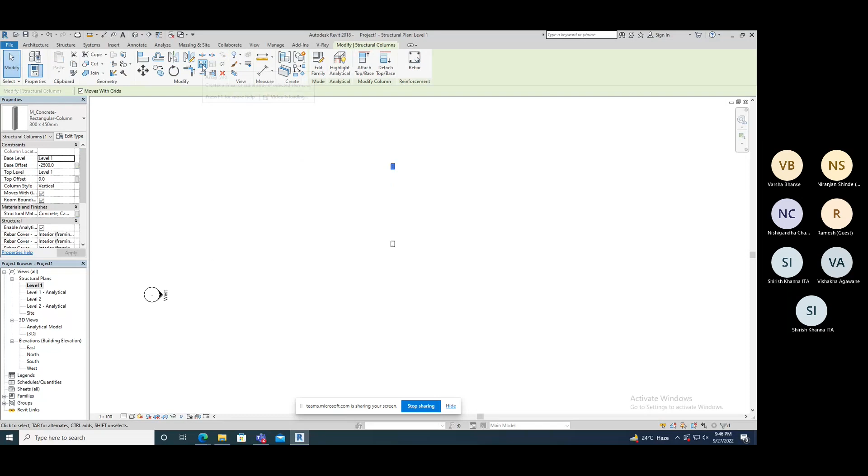Array, radial array, 6 numbers required. Second, angle between the two is 60, or last is 360, and change its center to this one, and something is wrong, it is not taken.

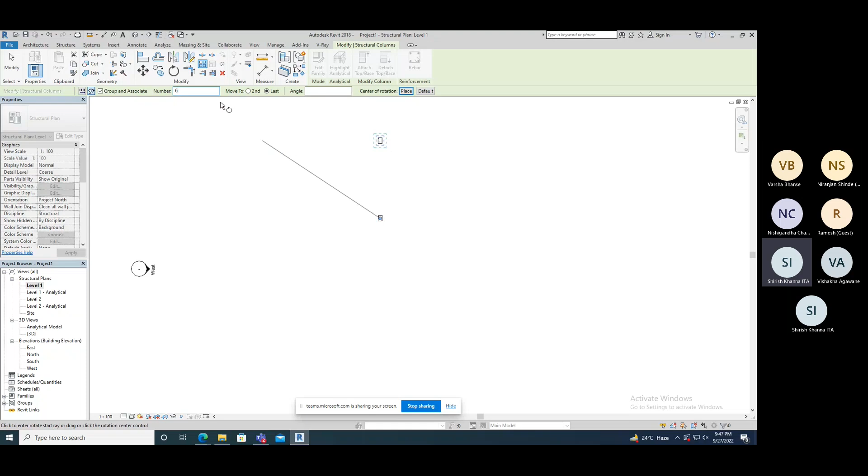Radial, first change the center now, and we can use it. How many required? 6, and you can use, pick it from here, and then you can take it at 45 degree. Now it is created.

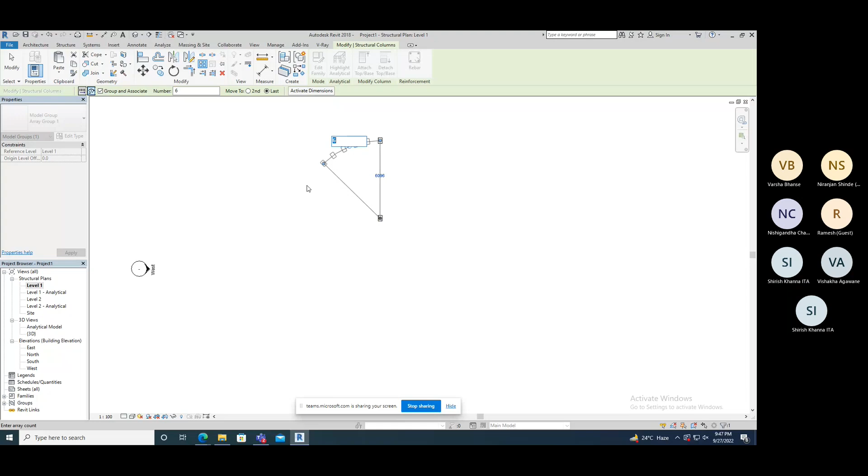See, last 45 degree we take, so all 6 are created into 45 degree. Okay, you have to pick first and then give the angle. From where you want to give the angle, you can. Now I need 3 in this, so this number you can change.

Okay, clear? Any doubt in it?

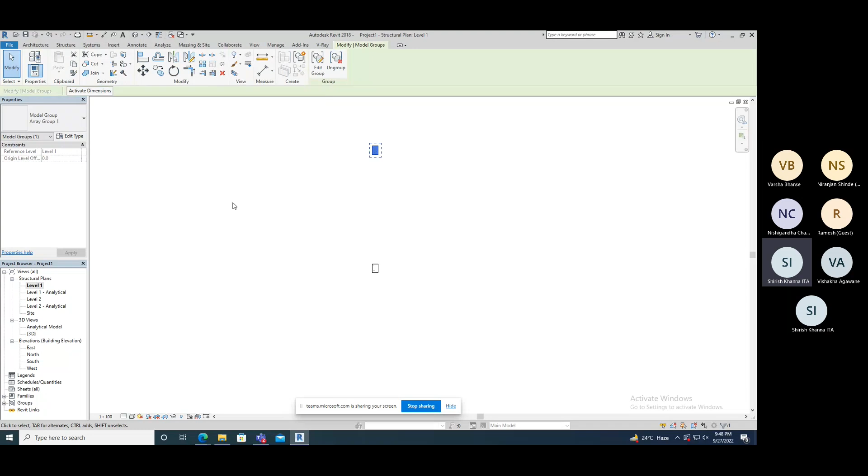In any modify tool, here we have scale command. See, in this case, we have predefined objects, so we can't scale it. We can scale into family. Otherwise, you can create your wall here.

Wall you can scale. See, it is 1100 mm wall. I need to scale it by 2200, means double. Generally we are doing dimension change, but if you have command scale, go with it, take numerical value and change this double and enter.

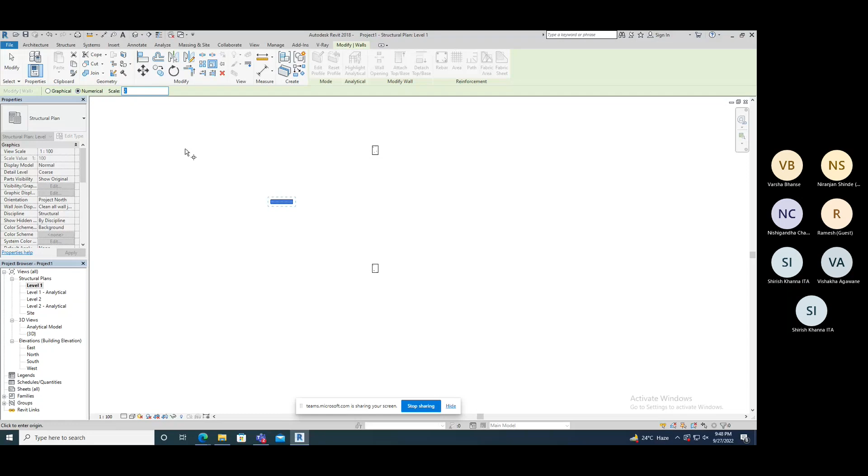Okay, see, now it is 2200. Clear? Yes. Tell me if you have any doubt in any modify tool.

What we learned today? We are learning how many types of foundation are there, how to open from library, load family, how to change its material, how to create new material, how to change the material from asset browser, how to change the edit type properties, why we are taking duplicate, and then the modify tools.

Align, offset, mirror pick axis, mirror draw axis, split with gap, pin and unpin, array, scale, move, copy, rotate, trim corner, trim single element, trim multiple element. Any other thing we learned today?